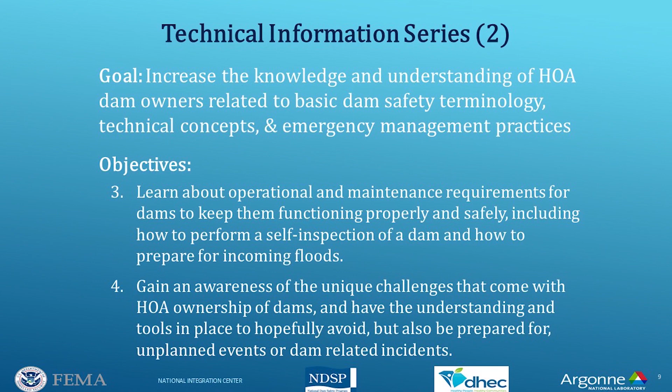And our fourth, to gain an awareness of the unique challenges that come with HOA ownership of dams. And that's a special topic of this webinar series, the unique challenges. And so to provide the understanding and tools to hopefully avoid, but also be prepared for, unplanned events or dam-related incidents. Those are our four objectives for this series of webinars. And the schedule, again, after today's webinar, we have 3 more webinars planned. These are the first Tuesday of every month. May, June, and July are still on the horizon.

And with our May webinar we will really dig into understanding emergency action plans and inundation maps, and how DHEC creates inundation maps and some of the technical aspects of that, and then how DHEC and yourselves, the dam owners, can work together to create an emergency action plan and to help you be comfortable and familiar with your emergency action plan.

In June, FEMA will lead the June webinar and really focus on risk and crisis communication strategies for emergency situations with dams. FEMA has very special expertise and subject matter experts that can really shed light and bring a lot to the table for that webinar. And then our July webinar will conclude with some unique considerations for HOA dam owners. We want to focus on some of the legal and financial challenges and solutions that HOA dam owners face, and we'll talk a bit about that more.

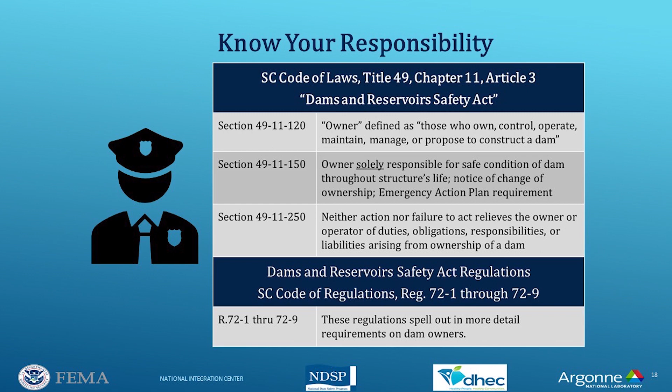So I'd like to introduce everyone to a concept called standard of duty or standard of care. This is the concept that there is a standard that everyone who owns a dam is expected to maintain in the operations and maintenance of your dam. And so you won't really find this in our regulations. This is more, again, general knowledge, a general understanding.

But dam owners are generally considered responsible for carrying out the following duties: inspecting their dam regularly and completely. And by inspect, this is not necessarily the same as a DHEC inspection, but this is basically to state that the dam owner is responsible for knowing the condition of their dam and monitoring those conditions regularly. Also, dam owners are considered responsible for maintaining their dam structure and related equipment, meeting the regulations, being in compliance with the DHEC regulations, preparing and following an operations manual.

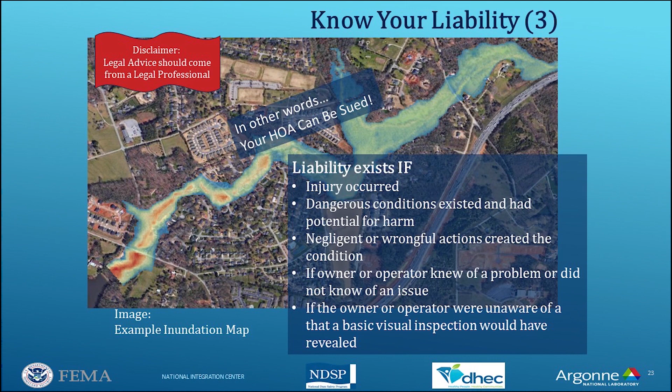That's the summary statement. And so maybe you're asking some questions here. We kind of envision some questions you might be asking. So, hey DHEC, how is liability shared in an HOA? Does everyone in the HOA share this liability equally?

So that's a tough question to answer. DHEC's answer here is that there is no one answer, because every HOA or POA is set up differently and has different covenants and bylaws. How your HOA is or maybe is not incorporated plays a role. And so you have to, again, look at your unique situation and talk to a legal professional.

So here's another question that we thought people might ask. Hey DHEC, if I serve as my HOA's main point of contact for the dam, am I taking on personal liability? What happens if something goes wrong on my watch? So maybe someone within your HOA has taken on the dam as their duty. Their role is to be your dam officer in a sense. And so what personal liability this may bring with it.

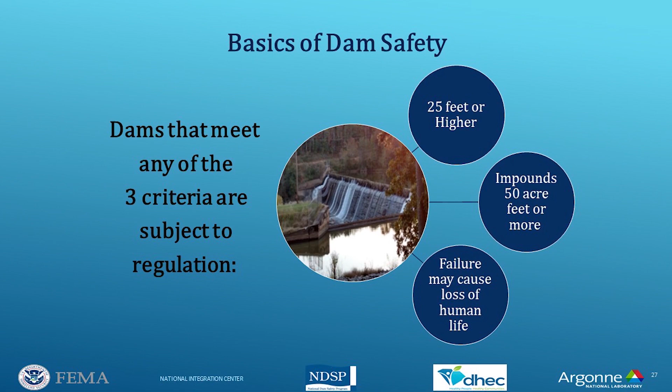And so it's a unit of volume, and so any dam that impounds 50 acre-feet or more would be subject to regulation. And then lastly, any dam, regardless of its height or impoundment volume, that could cause loss of life is also subject to regulation. And then in South Carolina, the Dams and Reservoirs Safety Act has 3 hazard potential classifications that dams fall into. You're one of these 3 if you are a regulated dam.

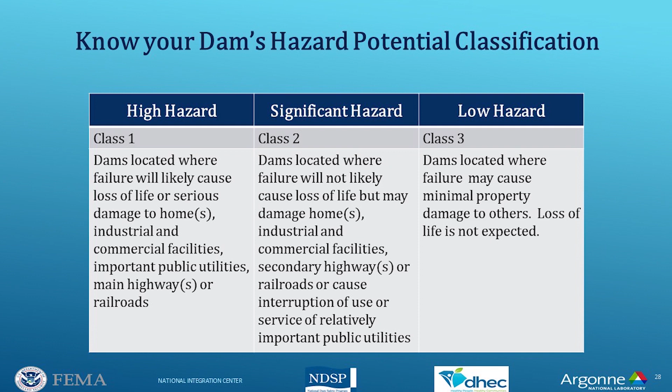And so high hazard, in short, think of high hazard as potential for loss of life. Significant hazard, think of it as not likely to cause loss of life, but may damage homes, industrial, commercial facilities, and infrastructure. And then lastly, low hazard dams are dams that really are not expected to have any consequences. Minimal property damage is about all we would expect from the failure of a low hazard dam.

And so it is DHEC's job to assign a hazard potential classification. Ultimately, it's DHEC's decision, and DHEC has the authority. But we don't do this in a vacuum. Some of the factors that go into the hazard potential classification are as follows. The first is input from the dam owner and or the dam owner's engineer.

And what I mean by input, knowing what is downstream of the dam is generally something the dam owner is going to know better than DHEC. We may say there's a house or a structure downstream that would be flooded in the event of the dam failing, and so the dam owner can tell us, no, that is not a house. That's a vacant, dilapidated barn.

So that kind of information can really inform DHEC's hazard class assessment, and also the dam owner's engineer can provide technical information to help us in how we set up our model and how we run the simulation to determine what areas will flood.

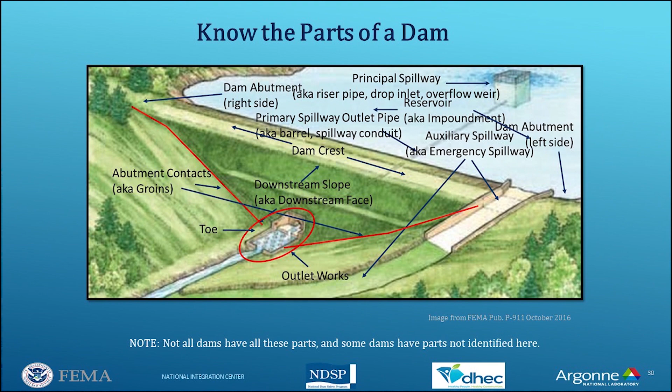The downstream slope obviously is the downstream face. There's obviously an upstream slope and an upstream face, but this image doesn't show that. You have an outlet works where the flow from your primary spillway emerges on the downstream side of the dam. The toe is generally where the downstream slope meets the natural ground at the bottom of the dam. And so those are some of the basic terms with the parts of a dam. And looking at an actual dam, you can see what these look like.

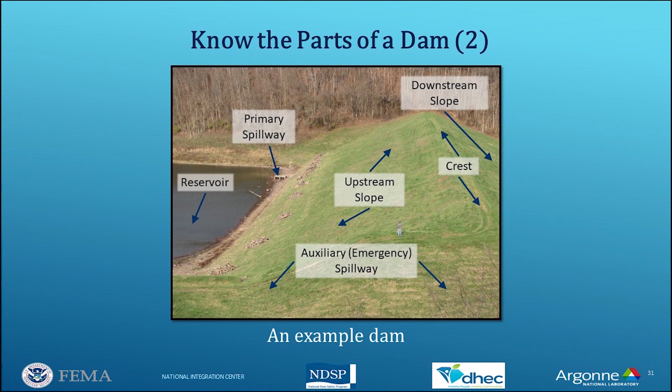Many dams, not all, but many dams have a low-level drain or low-level gate valve that allows for draining the lake if needed, and also for lowering your lake to a level below the top of your primary spillway.

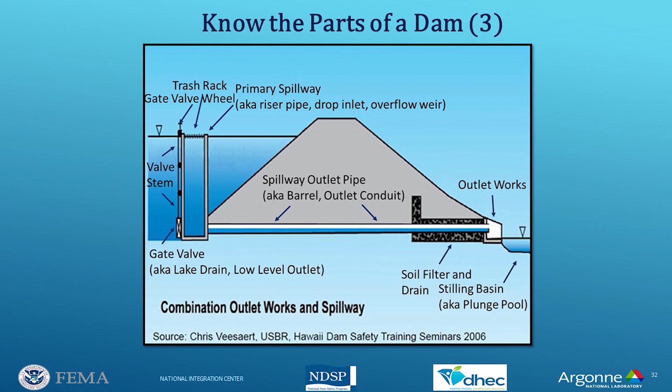And then in more recent designs and construction of dams, we see soil filters and drains that are used, almost like a French drain, to relieve and help reduce the buildup of water inside the dam, in the embankment. So the filter and drain provide a release for that water, almost like groundwater that builds up inside of the dam. And so we see that more and more often in dams built to modern standards and modern design.

And then briefly we'll talk about some of the problems that we see with dams, what you can expect to see. Most of you have probably seen at least a few of these.

Internal erosion is the process where the earthen material within the dam is removed. At pipe joints is a very common occurrence, where joints of the pipe separate over time and provide a means for the soil of the dam itself to be removed from the dam. And this is not always at pipes. Maybe it's along a tree root. Maybe you have trees on your dam, and so the roots are providing a pathway for internal erosion, or maybe cracks. As you can see, cracking and foundation settlement can also provide pathways for erosion and the removal of soil within the dam.

A low area in the crest of your dam: as I mentioned before, ideally your crest is level along the length of the dam, but that's not always the case. And a low area in the crest can be a location where flow will concentrate. If say you reach an overtopping water level, you can have channelized and concentrated flow, and that can progressively eat away at your dam and cut into the dam itself, and that can definitely lead to failure of your dam.

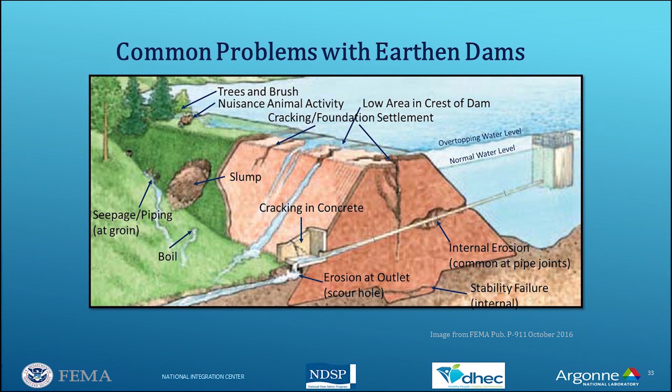If erosion at the outlet is allowed to continue, that can ultimately undermine your outlet works or undermine your pipe and cause either the pipe or the structure there to collapse, with very, very bad consequences. And then there's all other things that can happen deep within your dam, stability issues that also can be problematic.

Trees and vegetation is probably the number one problem that we see. And why is that bad? Well, vegetation obscures inspections, can harbor rodents, and can topple in high winds. And when a tree topples in high winds, that root system that gets uprooted can definitely provide a channel in the dam. If it's on the crest of the dam, it can provide a means of overtopping of the dam, or can almost be like pulling a plug on a bathtub, and I'll show a picture of that here shortly. But trees and tree roots definitely do not belong on or in a dam.

Tree roots can provide a pathway for seepage and piping through the dam. Excessive vegetation can result in debris in the spillway, which can obstruct flow and which can lead to failure of the dam. In that instance, we're talking more about your auxiliary spillway or your emergency spillway. If you have trees growing in your auxiliary spillway, that can severely restrict the flow that should be able to pass through. So it's important to monitor for trees and woody vegetation and remove it before it can become a problem.

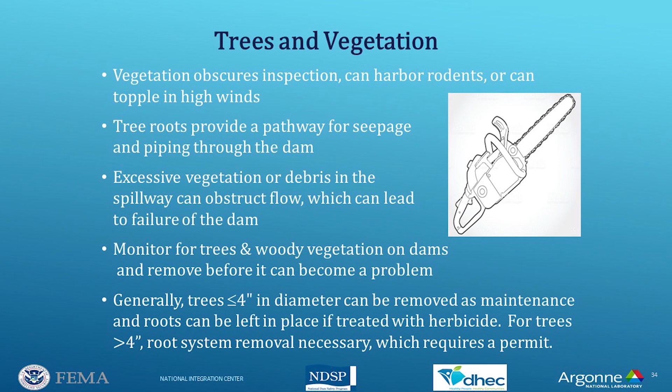And here in South Carolina, our rule of thumb is that trees less than 4 inches in diameter, we allow those to just be removed as maintenance. You can just cut them flush with the ground, treat the roots with an herbicide to make sure that they don't come back, but just cut them and be done with it before they can grow to a large enough size to really do some damage. And once they get above 4 inches in diameter, that's where we really have to look and determine if the root systems also need to be removed, because maybe they have grown to an extent where they could potentially cause a seepage or piping issue through the dam. And when root system removal is necessary, we require a permit.

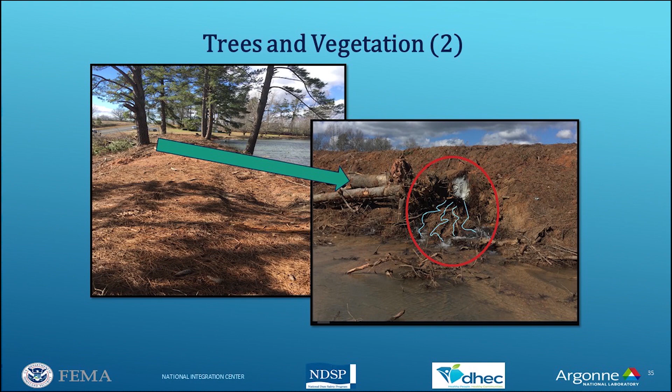And here's a picture of a dam where the owner removed the trees. This was not due to high winds, but as a result of the root ball being removed, it was like a pipe had been opened and a plug had been removed from the end of that pipe, allowing water to flow out. So it can happen where the tree roots are basically going to penetrate the dam and contribute to an uncontrolled release if the tree were to be overturned and the roots uprooted.

So knowing the condition of your dam is critical. You need to keep a file, keep your records. You need to know what your inspection rating was on your last inspection. How often should you be inspecting your dam? Well, you always need to know the condition of it, so that's up to you. But DHEC only inspects every 2 years for high hazard, or every 3 years for significant hazard. So DHEC is not the best resource as far as the condition of your dam. You are the best resource. DHEC is only 6 engineers in the state of South Carolina performing dam safety inspections. So we need the dam owners to help us, and, again, as your responsibility, know the condition of your dam.

And so I briefly talked a bit about maintenance and repair with respect to tree removal at least, but in broader terms, maintenance items should be done whenever they're needed, whenever you see a need for maintenance. And one way we distinguish maintenance and repair, just think about maintenance as something that, even if done poorly, it's really impossible to cause harm to the dam. And it really doesn't require any special technical expertise. And so because of that, it doesn't require a permit from DHEC to do maintenance.

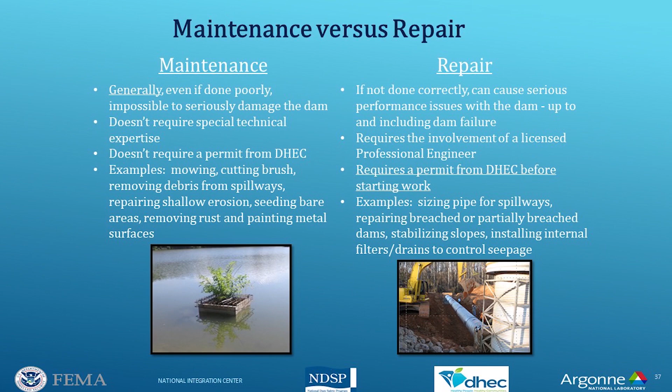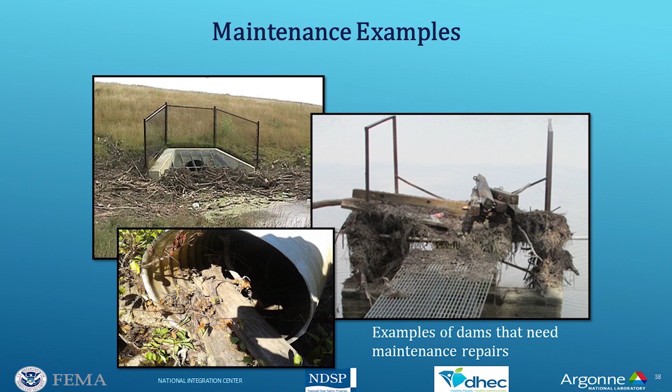And so, that's just a word of warning: working with an engineer, you need to make sure that engineer has the unique qualifications to do work on dams. And then just some pictures of needed maintenance, spillways being blocked, debris. Lack of maintenance is something that there's no excuse for, and it's something that can be so easily corrected before it becomes a repair problem.

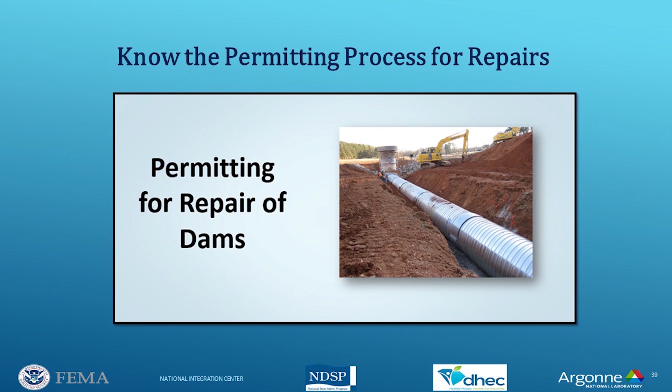And so when a repair is needed, and a permit from DHEC is required, just real briefly to understand how that works. First off, you have to apply to DHEC for that permit. A permit application has to be prepared by that licensed engineer, and then submitted to DHEC, where the dam safety staff will review that permit. We may have comments to send back to the engineer. It's possible we don't have comments, and that we go directly to issuance of a permit.

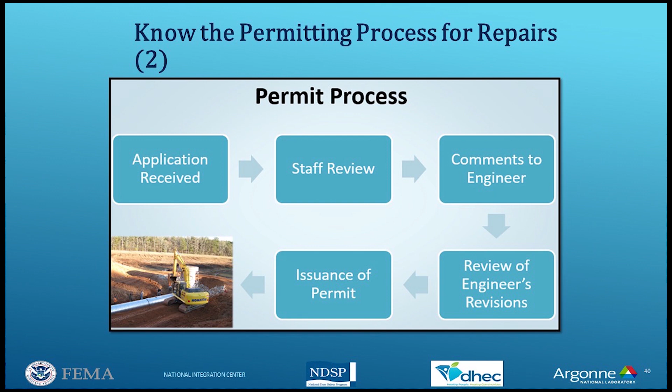But if we do have comments, then the engineer has to address those comments, and so we would then review whatever revisions or response to comments that the engineer provides. And then ultimately, upon issuance of a permit, you can start your work. So that's the permit process in brief for repairs on dams. I appreciate everyone bearing with me. I know that was a lot to go through, but I'm going to turn it over now to Preston Wilson to talk about risk.

Well, thank you, John, and I plan on building on a lot of what you just talked about. It really excites me today to be able to talk about knowing your risk and helping you to really understand your risk. Because really, if you think about it, all dams have risk. I'm gonna repeat that: all dams have risk. And to prove that, let's look at the definition of a dam. There's many definitions of a dam, but this is one I picked out. It means any artificial barrier that has the ability to impound water, wastewater, or any liquid-borne material for the purposes of storage or control of water. So any dam that has the capability of storing or holding back water has risk.

And now I'm going to jump into what those risks are. To understand what your dam risks are, you have to understand what dam risk is. We look at dam risk within three components: your threats, your performance, and your consequences. Your threats are what's loading the dam. What are the threats that are likely to occur at your dam? We're going to get into those in a second. John talked a lot about the performance factor, and that's how your dam will perform when it's loaded by these threats, or just regular loading. We have a good understanding now of some of the performance issues of dams, but I'll talk a little bit about how that fits in.

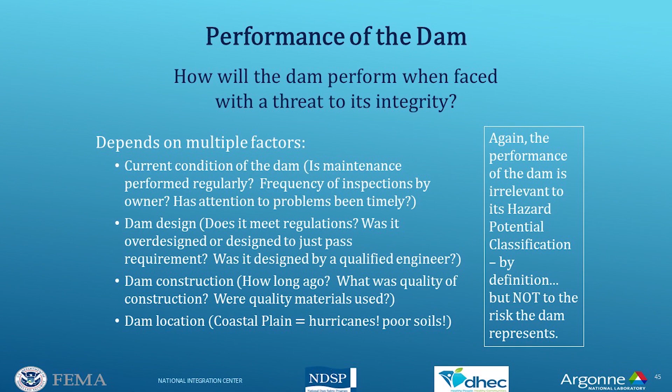And so now let's talk a little bit about incidents. So in FEMA, we have notice events and non-notice events. So notice events are just that. You have a little bit of notice before the event occurs, so you know that something might be going on. There's some warning time to do certain things, whether that's what we call interim risk reduction measures, things that you could do to reduce the risk, or things that you could do to

warn the general population. And John talked about a lot of the causes of the incidents. Just to go over a little bit, he talked about overtopping. He talked about the internal erosion of soils, and then he talked about inadequate maintenance and upkeep as well.

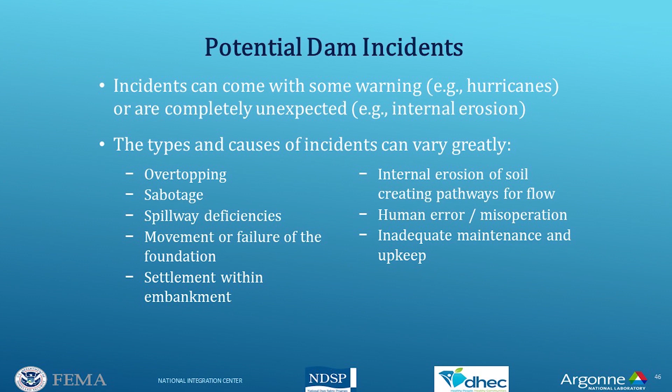So Alicia, if you could switch to the video. Can everybody see my screen okay? Yeah, we can see it pretty good. Yes.

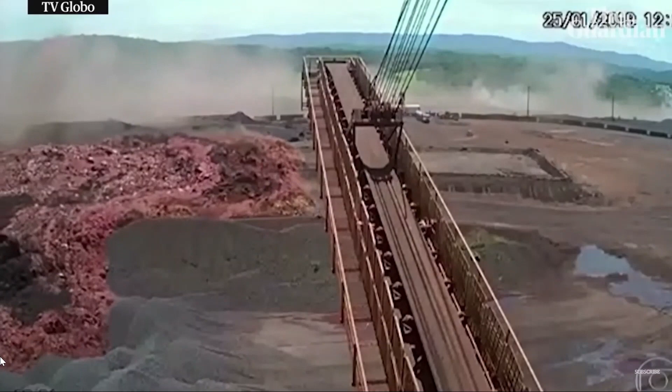But you can also have sudden failure. This is a dam in Brazil that failed suddenly. And as you can see in this clip, you have people actively trying to get away from the flows of the failure. All right, we can move on to the next video, Alicia.

So here, what... Neil deGrasse Tyson? Sorry, it's an ad. Okay. It should not be on here. It's taking a while. We may skip this. If it doesn't come on in the next few seconds, we'll skip it. So let's skip it and go back to the slideshow, Alicia. And I'll just talk about it.

All right. So what I was going to show you is a simulation of a dam failure. What that simulation is showing is a sudden breach of the dam. It's showing people's residences, homes, streets... excuse me... streets and things that will be impacted if the dam was to fail.

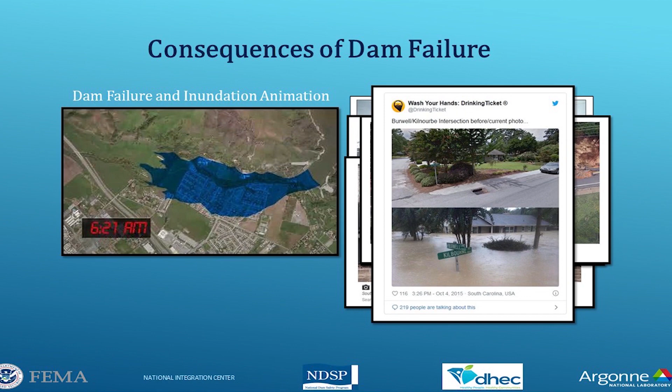And maybe nobody can get in here. Nobody can get out for days because that road might be destroyed by your dam breaking. And here's just a picture showing what an area looked like dry and what it looked like wet after flooding events.

So the consequences of a dam failure, and I really like this quote. It was by President Eisenhower, and it says, "Plans are worthless, but planning is everything." We at FEMA really like plans. We require people to do all kinds of plans, more than I even know. And we know South Carolina DHEC has a requirement to do emergency action plans, and we get that.

We like the plans, but the planning part is really what mitigates or helps to eliminate or reduce risk. It's the planning process that helps to reduce the risk. Just having a plan and putting that check mark by the plan without knowing what's in it, without doing any process before it, really doesn't help to eliminate the consequence.

But actually doing planning, working with different individuals, understanding your risk, that's what actually reduces the risk to the public.

And I really like this slide, and I'm going to say this a couple times too, that dam safety is really a shared responsibility. And I'm going to say it real loud and real strong now, that dam safety is a shared responsibility, not just the dam owners and operators' responsibility. They have a huge responsibility in dam safety, but there's other people with roles and responsibilities in dam risk management.

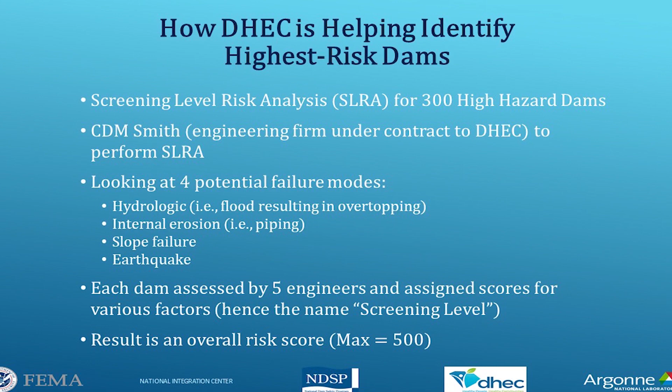It's kind of a new way of thinking here in South Carolina, and so we're kind of excited to get those results finalized. And once we do have those, we'll be sharing those with our community of dam owners. So that's all I had on that. Preston, you can take it back now.

All right. Thanks, John. This will introduce you to Nick Slipsoff, and what he's going to talk about is preparedness. Some things in preparedness are dam emergency action plans, and we'll talk a little bit more about that. Training, understanding your inundation mapping, identifying critical infrastructure and impact to business, and then communication with the dam operator and local emergency management.

And also in preparedness, this is preparation for when you get that really intense rainfall, things that you could really think about when that threat comes. Evaluate the water level in the lake and pond. Determine if the water levels can be safely lowered from incoming flows. Coordinate water releases with other dam owners and property owners downstream.

And this is important: while it is safe, clear debris from spillways. And review your emergency action plan, and then keep alert and watch as the storm passes, and watch for rising waters.

So I believe, Nick, I'll hand it over to you. Nick, are you on the line?

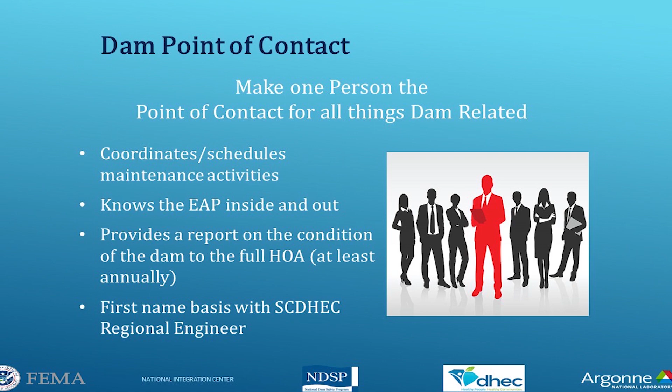You saw earlier the picture of the inundation map. Why is that important to not just you folks, but to me as a former emergency manager? That would show me the risks that Preston was speaking to, what risks there are to the community downstream. And then as an emergency manager, what you have to do is look at that and be able to plan out for the worst case scenario. What would happen if everything went loose, and what would be affected in the community below?

Are there businesses? What's the infrastructure like? Are there hospitals, nursing homes? What other residents might be downstream? So that inundation map that we spoke to is a very, very important piece to the planning process outside of your world in the dams, but also to the world of emergency planners within the community.

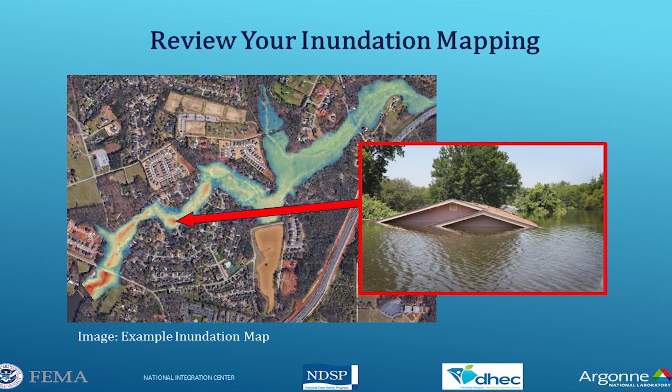So we spoke about knowing the potential consequences of a major failure of your dam. The impacts are basically flooding, trapped persons, injury, death, road closures, property damage, debris, and other potential consequences. It doesn't necessarily mean it would be an immediate impact, but maybe long-term, like an environmental loss, economic loss, crop loss, the food chain disruption if there's a major transportation route that might have been taken out, loss of wildlife and habitat, hazardous materials.

Is there a chemical plant or an industrial zone that might be affected? Looking at the loss of revenue. Obviously, if you have a business that's flooded out and it has to repair and take some 6-8 weeks or longer to get back in, you're talking about some potential issues there.

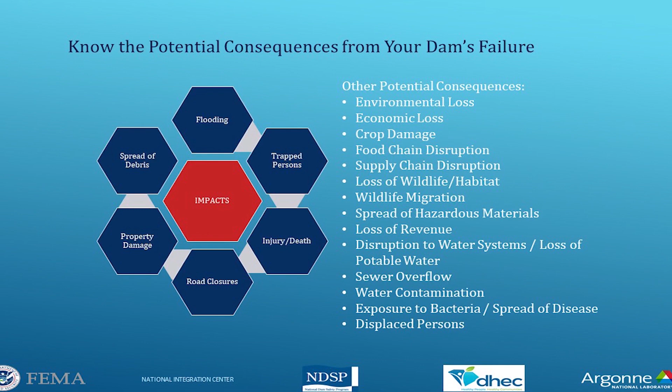Disruption to the water supply. If the dam was a potential water source for the HOA, or if it was feeding other areas, that might be a problem. Obviously, sewer overflow, water contamination goes along with that, and exposure to bacteria and disease, and also looking at how it potentially displaced people.

And what about if your dam's lasted 60 years without any problems? Is that something to be concerned about? Or the dam survived the floods of 2015? Or what if they have just inspected it, why should they need to now? Past performance is no guarantee.

Whether you just made repairs, this is why John was really emphasizing it. Walk your dam, get to know it. Look at the potential issues that he spoke to: the rodents, the vegetation growth, and those kinds of things. If you do that a lot more than just an annual inspection, you might be able to ward off any problems on down the road.

And so here's another concern: there are people downstream of the dam in the floodplain, and don't they have to buy insurance? First of all, being downstream from a dam doesn't necessarily mean people are in the floodplain. The dam itself may be the only flood risk they have.